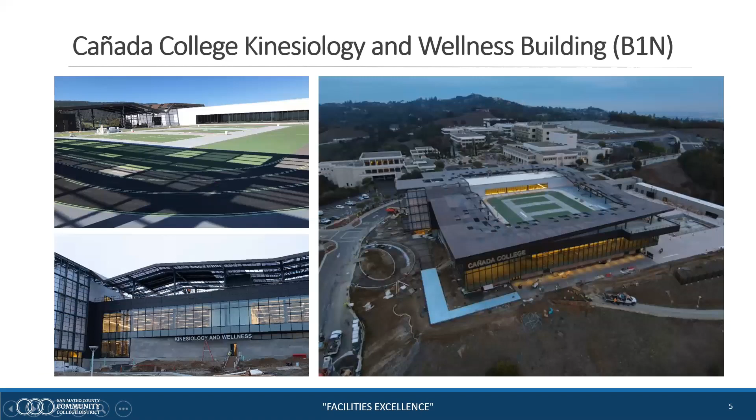Inside the building, it's exciting to see these beautiful spaces and finishes. You're looking at the main spine of the building from level 2 down to level 1. That's another drone view of the building as it stands right now.

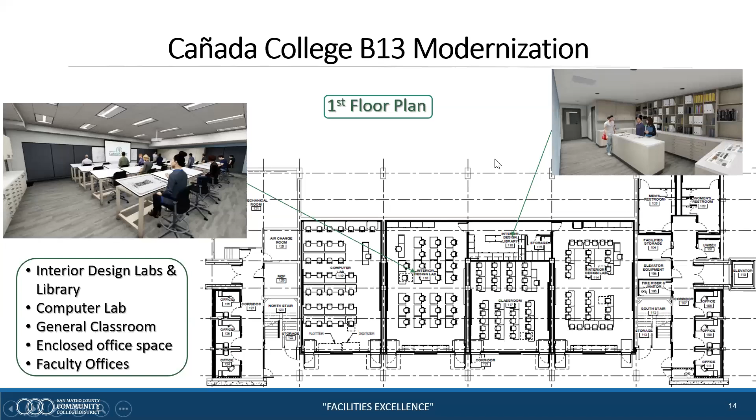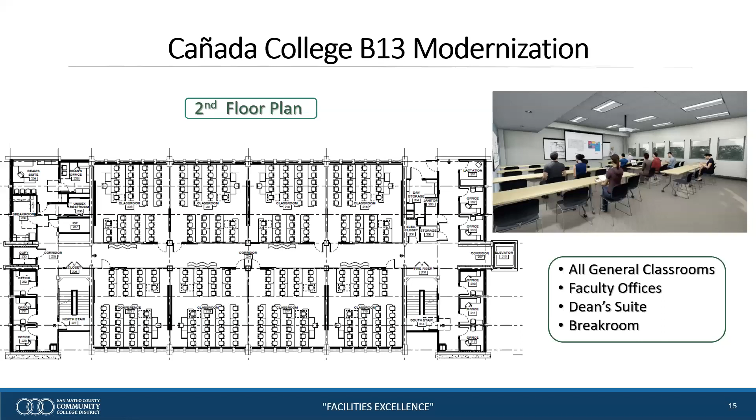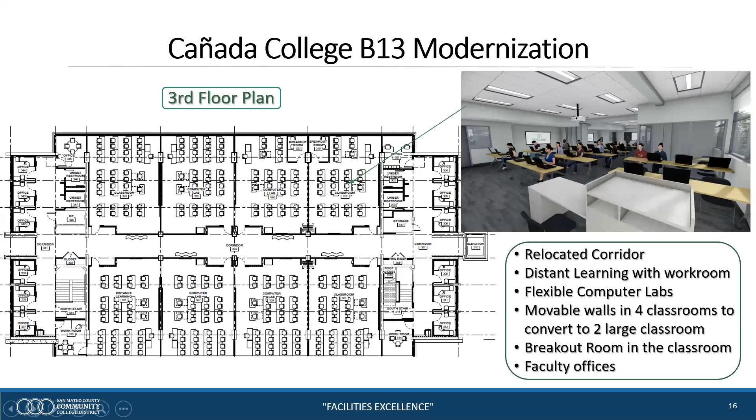And this is what is our plans on building 13 modernization project. Thank you to all the persons who helped us on the design on these projects.

Okay, now I'd like to introduce Apeksha with Swinnerton Management and Consulting. She is the construction manager running Cañada Building 22. Thank you, Jose. Good afternoon, everybody. I'm Apeksha Gajar, a construction manager with Swinnerton, and I'm managing the design and construction of Building 22 Swing Space project.

In brief, we're an 11,870 gross square foot building, and we'll be housing the new permanent offices for the Public Safety Department, as well as the Education and Human Development Department and Digital Arts and Animation. Digital Arts and Animation will have 3 classrooms dedicated to their students, and Education and Human Development will have a dedicated classroom as well, as well as offices.

We will also be updating the existing restroom facilities for accessibility, and we'll also be updating the adjacent parking lot for accessibility. The project is currently in construction. We started construction last November, and we are expected to complete it by end of April.

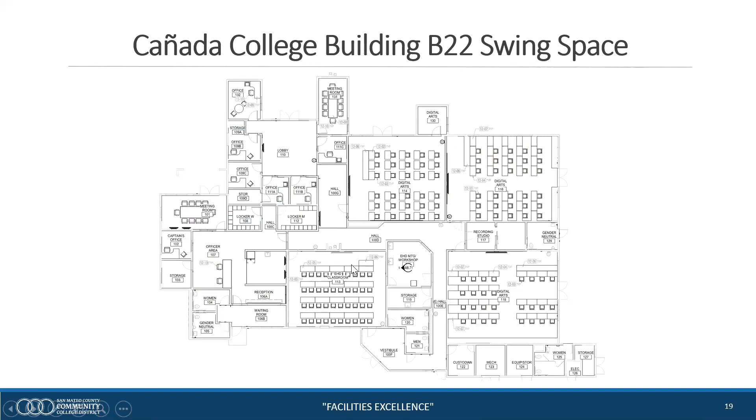Next slide, please. This is the general layout of our new spaces. Towards the southwest side of the building is the Public Safety Department. The northwest side is the new entrance for Education, Human Development, as well as the Digital Arts and Animation spaces, surrounded by faculty offices and meeting areas. Towards the east side of the building are the 4 classrooms, 3 of which are digital arts, and 1 on the south side is for Education and Human Development. They also have a meeting and workshop area.

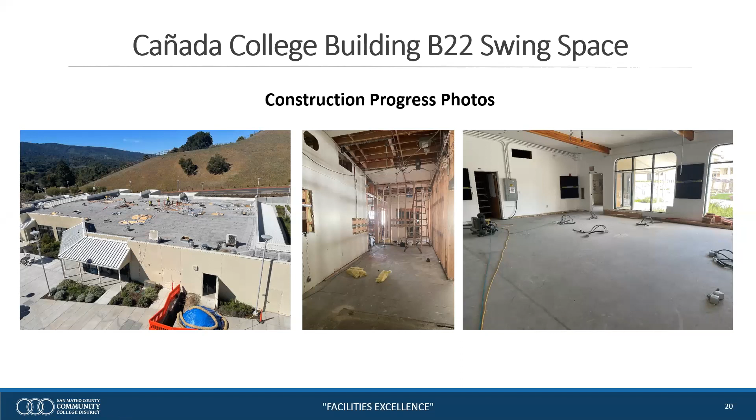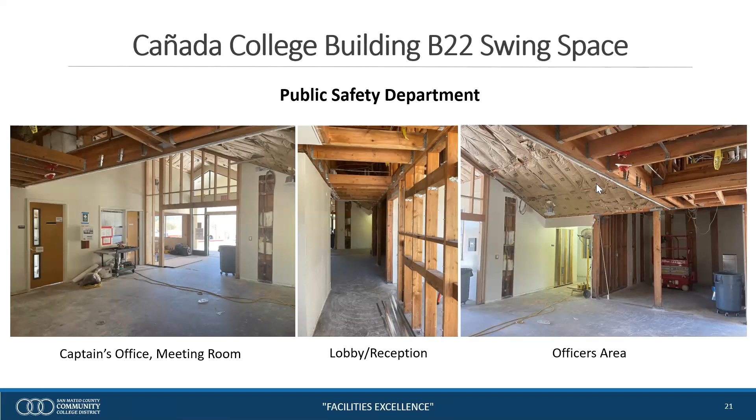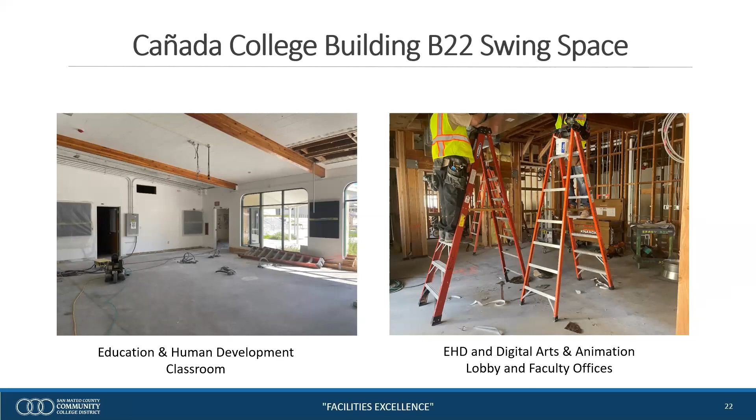Okay, now I'd like to turn it over to Marie Mejia, District Project Manager, to give you a brief overview on some minor modifications that are going to happen in Building 9. Thanks, Jose. Hi everyone. So there's a lot of domino moves that's going to happen in Building 9.

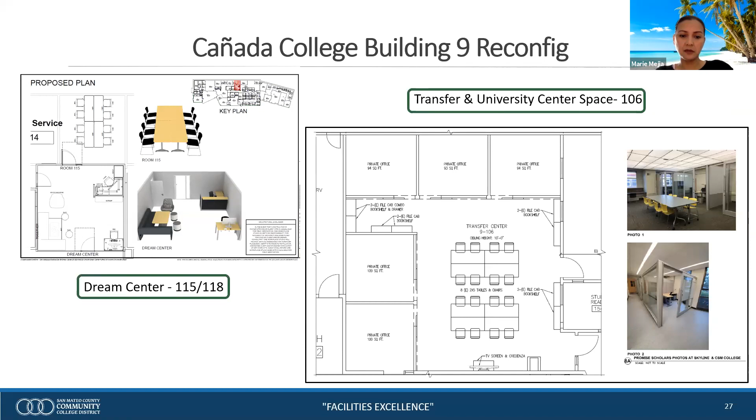We'll be placing new glass offices similar to the ones in the photo. The top right photo is a Promise Scholar office at Skyline, and the bottom right is a CSM Promise Scholar office. And I think that's it. I'm going to turn it back to Jose for any questions.

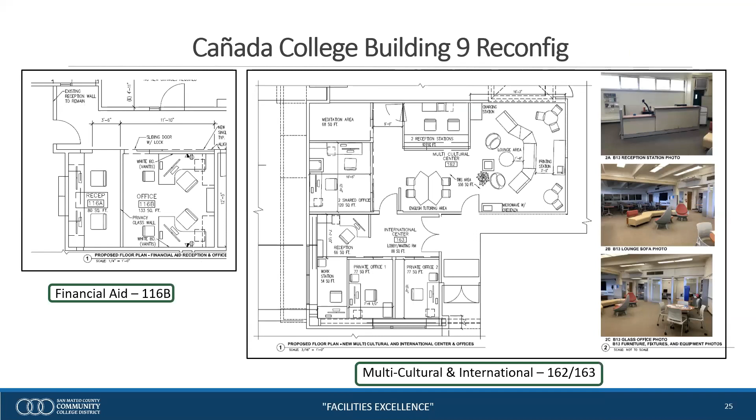Marie? No, it is not included in the reconfig building 9 project, but I will turn it to Michelle Rodovsky if there are any thoughts on putting plexiglass in the Welcome Center.

So, Michelle, are you there? Okay, go ahead. Workspace assessment and such? Correct.

Every time we have folks returning back to campus, we go through a workspace assessment process that is quite robust and extensive, where the program managers of the area, the deans, and the facilities managers get together and review the spaces, how they're used, occupancy, cleaning strategies, ventilation strategies, etc. Part of that process is to assess in transactional spaces whether or not we need to install plexiglass to help protect our employees. So if that's part of the question, that process will happen on the onset of return to that program. If it's removing furniture now and putting in a different type of furniture, that's a different conversation.

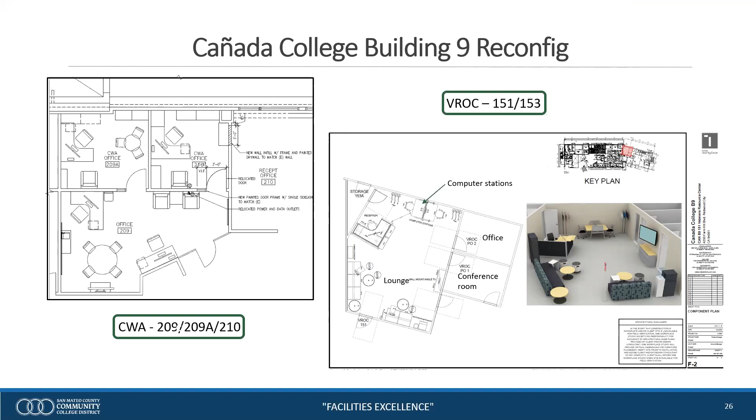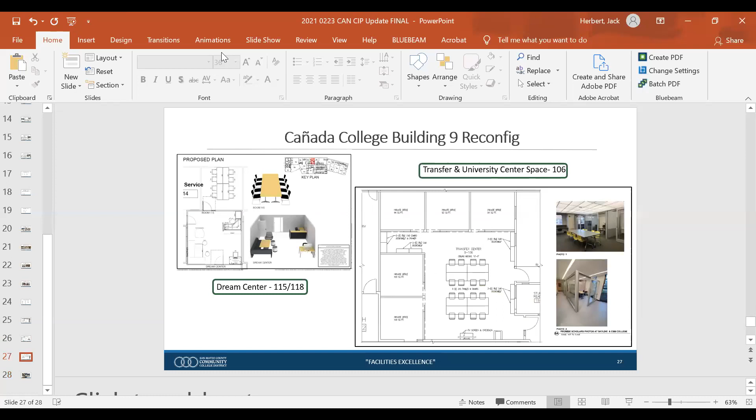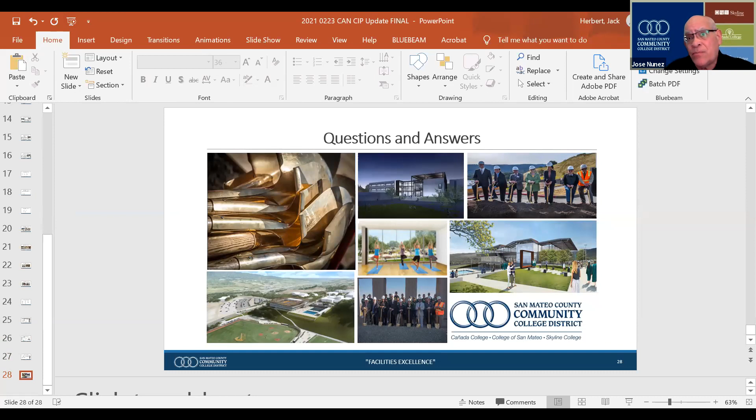Okay, I see that there's no open questions, President Moore. If there's nothing further, myself and my team are more than willing to answer any particular questions. Thank you so much for you and the executive team allowing me and my team to brief the staff and faculty here at the college.